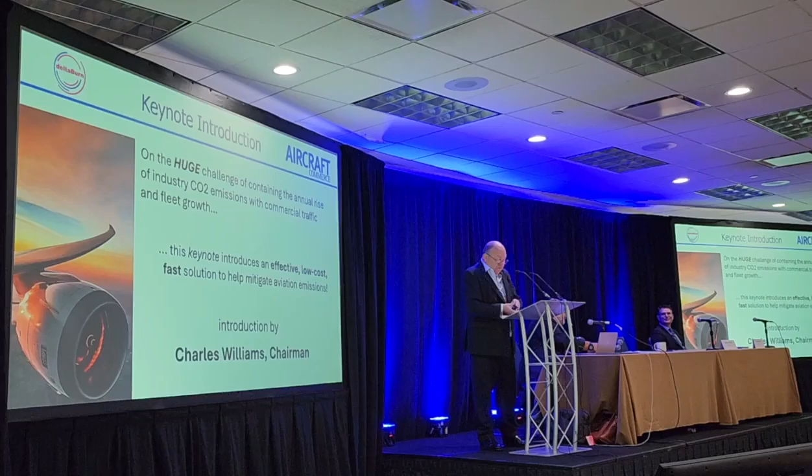I'll start off by saying the industry has a huge challenge ahead of it. As you're all aware, the industry continues to grow each year in proportion with the economy. The exception, of course, is when we get a big recession or downturn due to something like COVID, but generally the industry always recovers and continues on the trajectory.

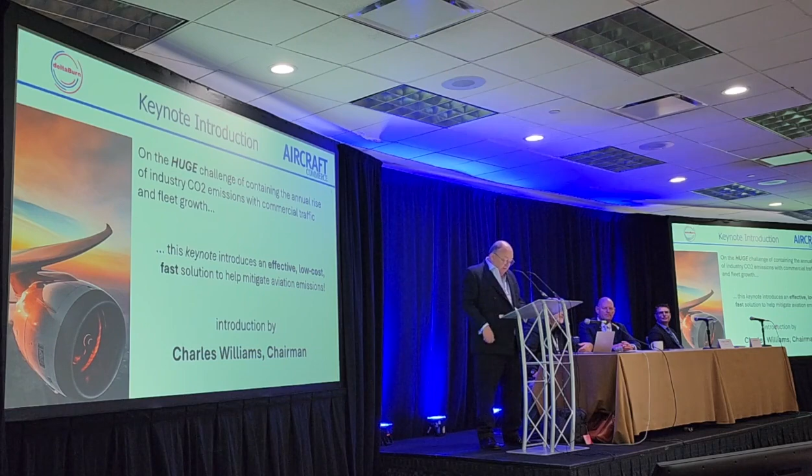Each year IATA produces a report, in the month of June, summarising what happened in the previous year. That summary includes the number of passengers boarded on commercial flights, number of commercial flights performed, the fuel consumed, and consequently the CO2 produced.

If you look at the historical data IATA produces, you'll see the average compound annual growth rate between 2004 and 2019 averages about 4.65%, which means it only takes 15 years for passenger numbers to more than double. And with that, you get an increase in the size of fleet, and an increase in the quantity of fuel consumed.

Just to summarise, in 2019 the industry consumed 96 billion gallons of kerosene, but that's risen to 99 billion gallons in 2024, having recovered from COVID. For this year, the whole year is forecast to be 103 billion gallons. Of course, that correlates to about 1.25 gigatons, or 1,229 million tons.

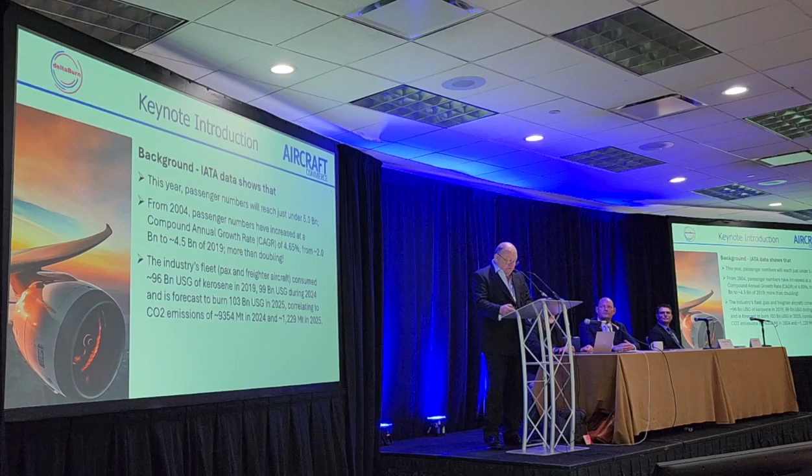Now, of course, the industry has to take its responsibility to get its CO2 emissions down. Under the Paris Accords, the industry's emissions are allowed to peak in 10 years' time, but then it's got to start declining again. The original target for 2050 was CO2 emissions of just 250 to 400 megatons - clearly a small fraction of what they are this year, and an even smaller fraction of what they're likely to be in 2035. However, in 2021 that target was changed to an absolute figure of net zero, which many feel a bit cynical about being able to achieve.

The point here, though, is that the larger the peak we reach in 2035, the larger the annual reduction has to be each year for the next 15 years to 2050.

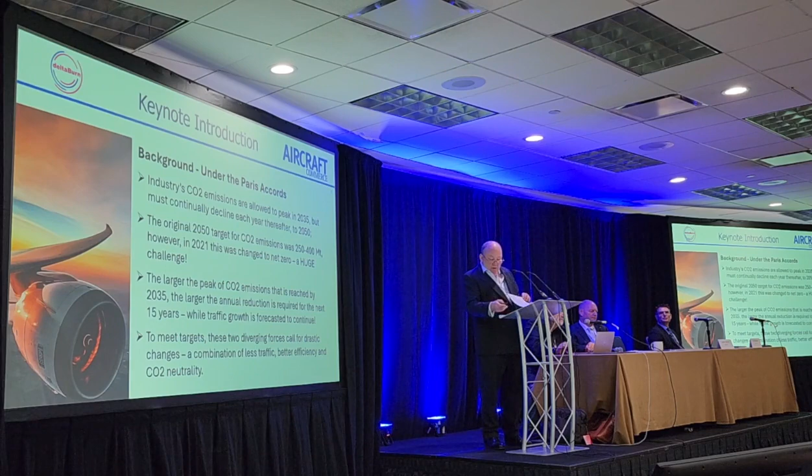As I was saying, we have a conflict because already historically, since the industry began in 1945-46, passenger numbers have increased exponentially, as does the fuel consumed, as does the CO2 emissions emitted. Although we have had a continuous improvement in fuel burn efficiency because of the steady, continual modernisation of aircraft and the overall fleet.

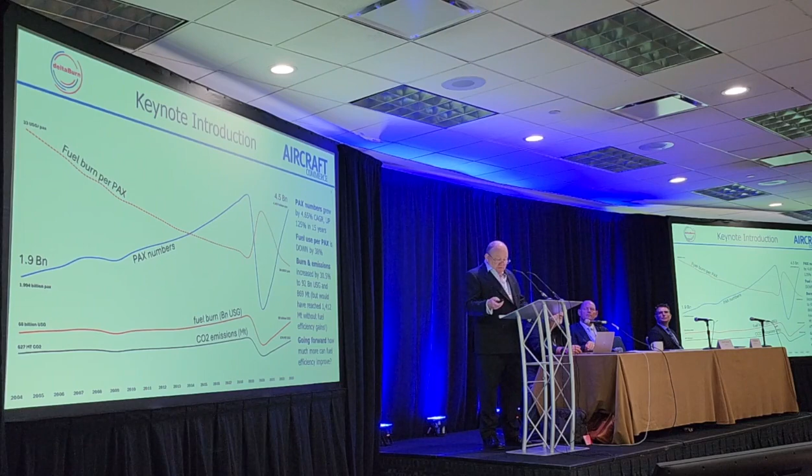Over the last 10 years, I've been at various conferences, spoken to lots of people, read lots of articles. There's all sorts of technologies that have been proposed to find an alternative fuel or propulsion system, or both. People talk about electric-powered aircraft, fuel cell powertrain, hydrogen, and so on.

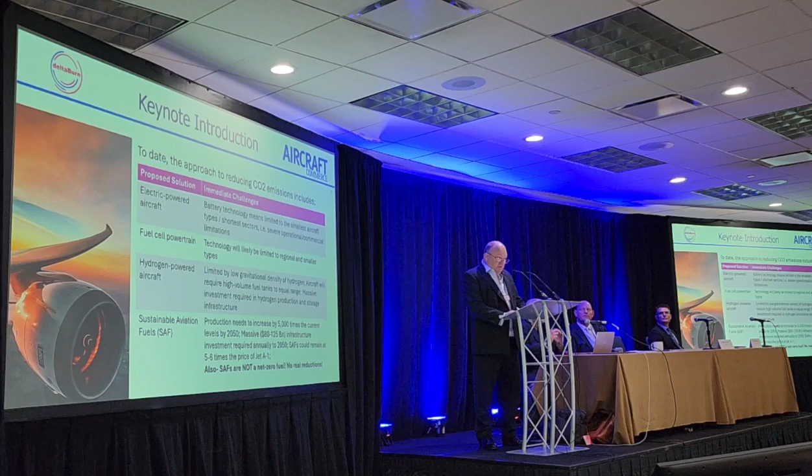As time progresses, it seems more and more likely that the big winner is going to be sustainable aviation fuels. That seems to be the only real plausible option at the moment for passenger aircraft at 150 seats or bigger.

The problem is, of course, the production of SAF is starting from a very small base. As of 2 years ago, projections were that current 2023 levels of production would have to be increased by 5,000 times to meet the demand the industry would have for the entire fleet in 2050. That in turn requires up to $125 billion of investment in infrastructure to build all these different SAF plants, and then there's still the issue of source material and what the end fuel would cost and how that would compare to current Jet A1.

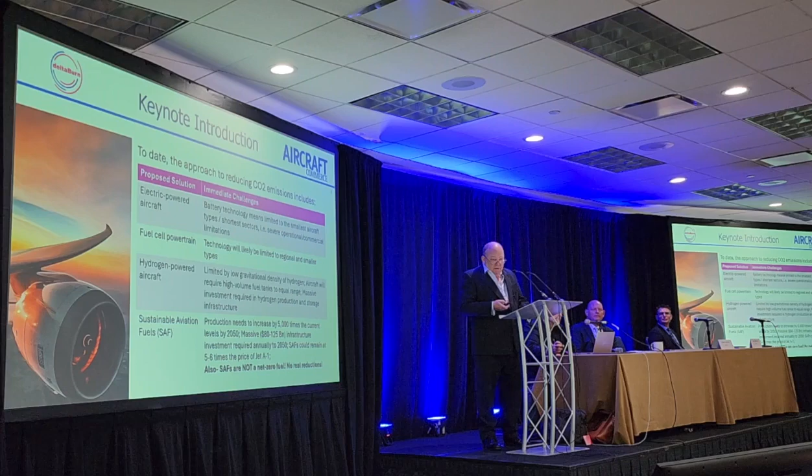Another factor, of course, is that not all SAFs are net zero anyway. So there are a lot of big question marks over reaching these targets of 2050.

So Sander is now going to explain in far more detail the DeltaBurn project. Sander.

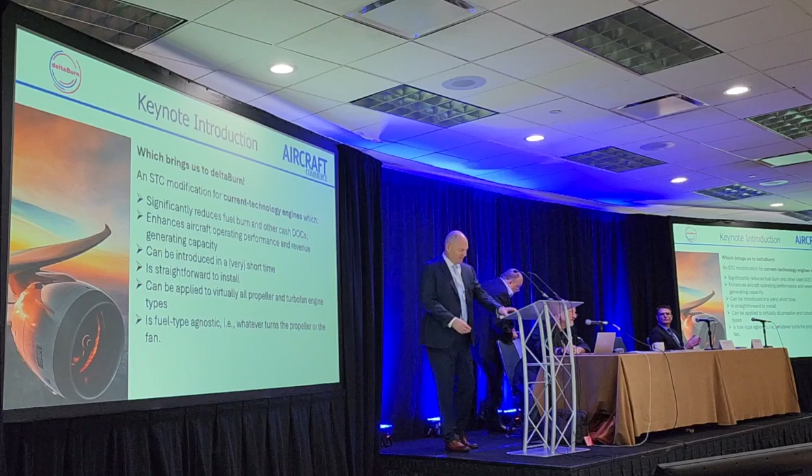So, you want to introduce yourself, Sander, or I can do it? If you look in the notes on the website, it's very interesting.

Sander Moor is an investor, board member and general manager of DeltaBurn, a Singapore-based company. Sander brings, apart from a big personality and lots of fun, four decades of flight operations support across many aero company profiles, areas of operation, climates and cultures, in most areas of flight and ground operations. The last two decades brought all of that together in deep airline fuel and operational efficiency expertise. Sander is managing this exciting startup, which he's about to tell you about, with significant fuel burn reductions and emissions improvements. So Sander, over to you.

Thank you very much, Nick. And thank you all for staying this late on the second day, which is not the usual size of crowd that we see. It's very nice, thank you. Thank you for being here for my next 20 minutes of fame.

Many of you have seen the outrageous advertising that I put out about the one-third fuel burn reduction that we talk about. I start this slide with double digit, which isn't just another way of saying it's a lot.

So who are we, DeltaBurn? We're an R&D company, basically. We do aero fluid dynamics, and not only that, we also try to bring this to market, so we do STCs. We are registered in Singapore, and we have legal entities around the world where we do STC work. Our main base of operations today is in Phoenix, at the airport of Deer Valley, where we have one of our aircraft that we use for test flying.

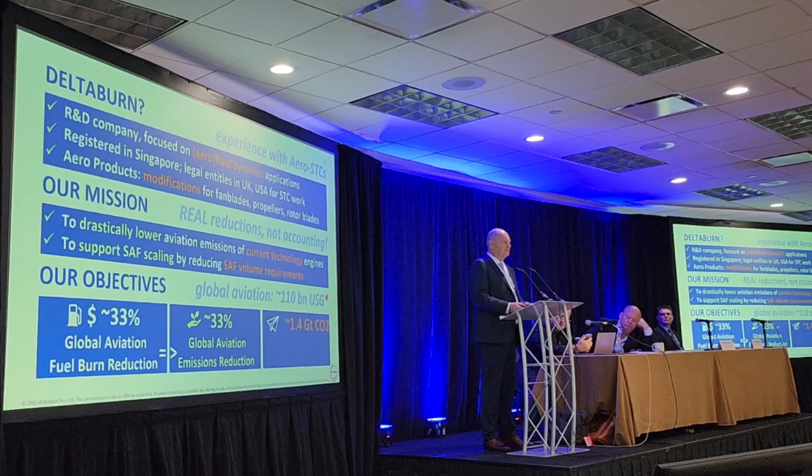110 billion US gallons - it's just another number. We've seen 103 in the previous presentation. It's 110 as far as IATA is concerned, but IATA only represents 80% of the airlines around the world, or the traffic around the world, so the number is likely to be quite a bit higher. We actually personally think it's around 125, 130 billion US gallons, which produces around 1.4 gigatons of CO2, give or take, which is 3.6% of the global output expected for this year, which means that if we can reduce it by one-third, it's more than 1%.

Now, the other thing about this is that the slice of pie in the whole CO2 balance that aviation represents is increasing, because other industries are getting greener faster. So the pizza slice of aviation CO2 is growing over time. All the more reason to do something about it.

The last thing that we do with reducing fuel burn so much is increasing range of current aircraft by up to 50%. That's the nice additional effect if you're able to reduce fuel burn that way. The big elephant in the room, 33% - how do we get there?

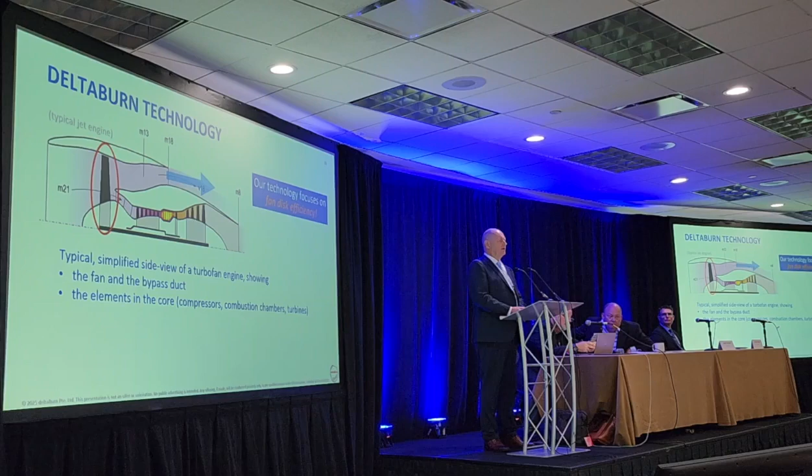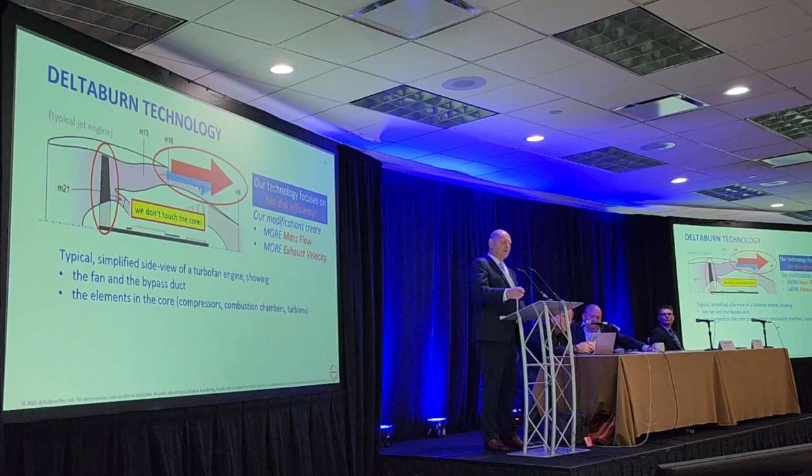Our technology purely focuses on the fan disc itself, the propulsion disc. So we increase the efficiency of that disc. Now, how we do that is still a little bit under wraps, but what we do is we drastically change the airflow around the fan blades. And in doing so, we create some really interesting secondary effects, which result in much more mass flow through the bypass duct and a lot more exhaust velocity. And this is signified by the larger red arrow.

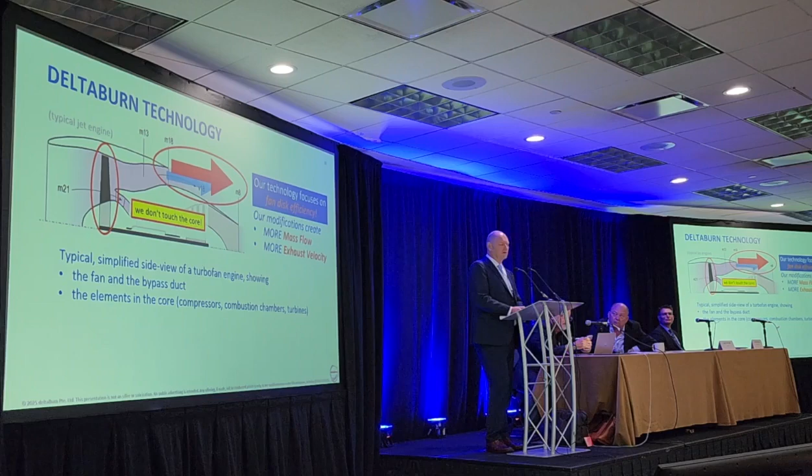Now what that means is, because we have more mass flow and more exhaust velocity, because we changed the fan, we have a lot more thrust. So now your 32,000 pound engine is producing a lot more thrust, which on the face of it is a great idea, except the bearings in the engine don't like it that much, and possibly the engine pylons don't like it that much if you start to pull a lot more. So what this actually means is, if you power back a bit, you can actually fly with the same thrust, but now at a lot lower fuel burn. And that's actually what we're doing.

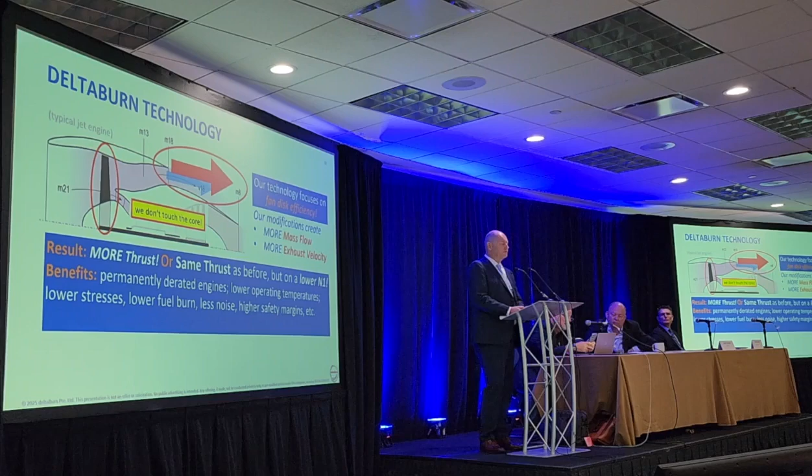That's the trick. We make the fan more efficient, we get more bypass flow, and because of that we can bring the power back and get the same thrust with less fuel burn. Now, there is a whole string of benefits attached to this.

We have permanently derated engines, much lower operating temperatures. On a typical flight we see 100 degrees less EGT, much lower stresses in your engines, much lower fuel burn, less noise on takeoff and landing. And there are much higher safety margins, because that extra thrust, if you want it to be available in a single engine situation just after takeoff or just before landing, the flight crew will have that extra thrust available. So it increases safety margins in that particular respect, but also during normal operations, because the engine isn't stressed as much as it normally is.

But the biggest thing is this: when we reduce fuel burn by so much, we reduce the emissions by so much as well. And not just the CO2, but because we run less fuel, we also produce less water, which means less contrails, which is also a topic of interest today. Our NOx is cut by around 50% because we run the engines at lower temperatures. So there are a whole string of benefits.

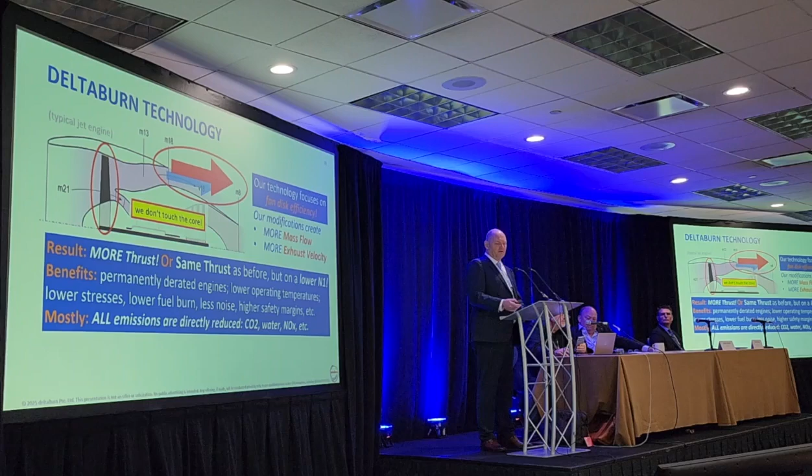Now, magic. Nope. We call it real science, and the patent office seems to agree. We have flight tested this many times, we have demonstrated this many times, and I will show you a demonstration in just a few seconds.

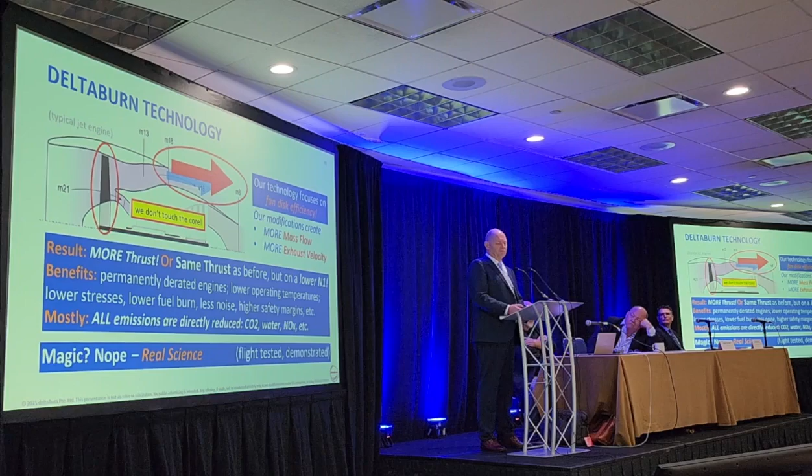The effect that we do on the engines is actually a bit similar to this, without the noise and the light show. But we see over 50% more thrust at altitude and at speed. And that's about the same amount of thrust that you really lose after takeoff. An engine, actually a jet engine with the fixed blade propeller at the front, where the fan is, loses about 50% of thrust all the way up to flight level. And we basically give a lot of that back.

What I'm going to show you is a 737 clip. We modified one engine on this aircraft, the left engine. And what you're going to see is a takeoff. It's working. Of note is that the left engine, before we modified it, was burning hotter and more fuel than the other engine. And I'll talk you through that a little bit later.

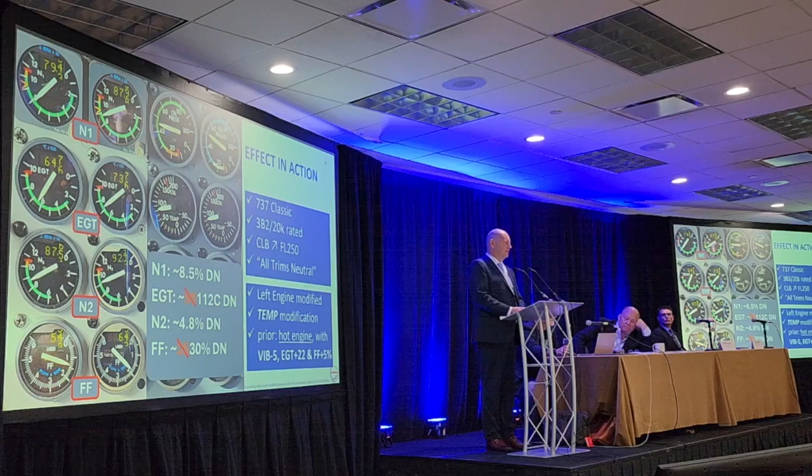Yeah, a 2-generational leap. The other thing I mentioned earlier was the 50% increase in range, which is an effect of a much lower fuel burn. Now, how does that translate to a real world situation?

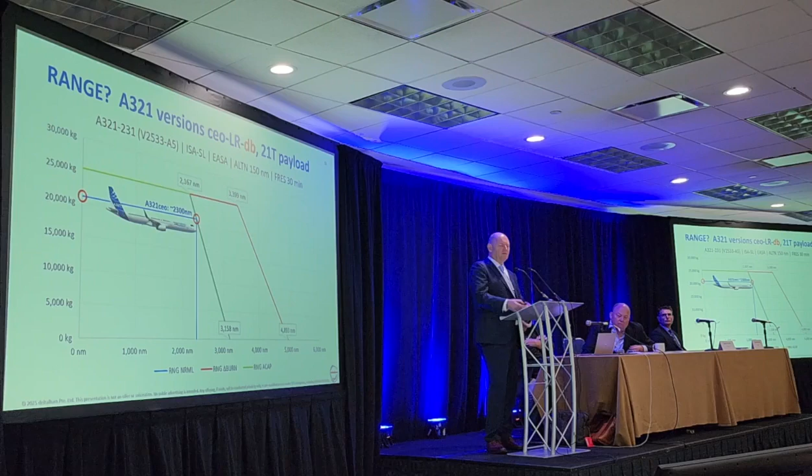Let's say we have a classic A321 CEO. That airplane has a range of around 2,300 miles if you take a 21-ton payload. If you modify that aircraft with our modifications, you get an airplane that does over 50% more, which is 3,600 miles. Now that becomes a very interesting airplane because it's only 10% away from the current range of the 321 long range, right? So with a very easy change to the aircraft, you create an airplane that is doing magic.

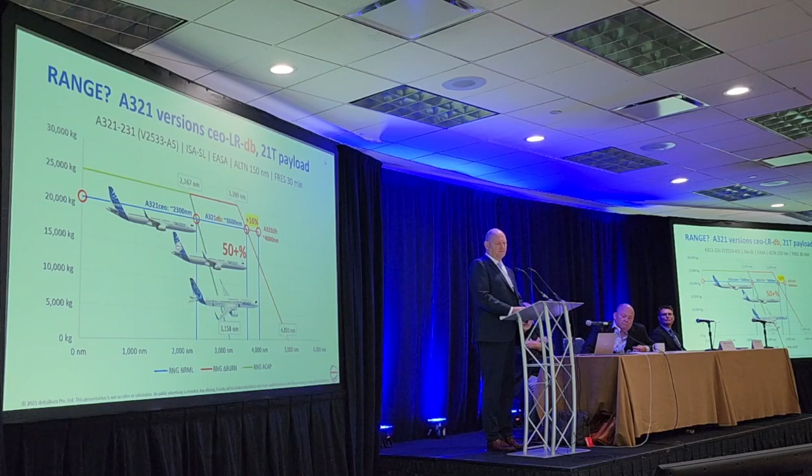Taking that same line of thinking a little bit further, if you look at the typical A380, burning, as we know, a lot of gas, doing around 4,500 hours a year, maybe even 5,000 hours. For the example, it doesn't really matter that much. And that fuel burn could be 12.5 tons, it could be 12 tons. It depends on how the aircraft is used, and that fuel price.

Then operating that one airplane per year will set you back around $39-40 million. And it will produce 170,000 tons of CO2. Now,

put the aircraft in an A-check, because what we do to the engine can be done within an A-check. And now we have 4 adjusted engines, and we have a thing called the DeltaBurn effect, which is a third reduction in fuel, a third reduction in cost, and all the other benefits that we talked about before. Now, if I were one of the owners of this aircraft, I would maybe pay attention. In addition, all the other effects that we just talked about.

Taking this one example to another next level would be this. It's a nice picture, by the way.

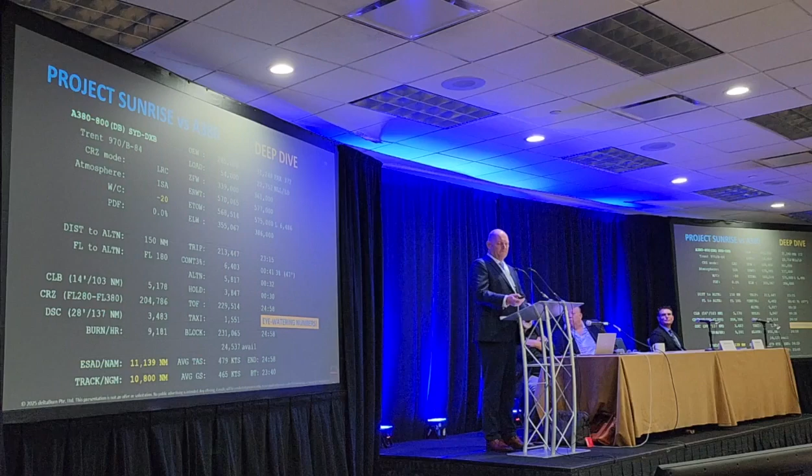And those are indeed eye-watering numbers. So we've used this term before, the A380neo. Somebody else has used this term as well for many years, and Airbus decided not to do it. We are, in a way, capable of doing this, of giving the world this, except we're not going to call it an A380neo. We will call it an A380 DeltaBurn.

But it certainly is a possibility. And all I'm asking anybody with an A380 is just give us one for 6 months, we'll do the STC, and we'll show you how it works. We don't have the cash to buy one ourselves, so that's the issue.

Where are we today? That's a big question. We do not have the jet engine STC yet. We are a privately funded organization. We do not have the millions needed to buy a CRJ or a 737 and do the STC. What we do have is enough money to do the STC for a turboprop. That's why we acquired this Merlin, our test bed, parked in Arizona at Deer Valley Airport, which we use for our turboprop STC, which we hope to complete by the first quarter of next year.

We developed some really interesting tech. We wanted to know exactly how much thrust these engines and propeller combinations are producing, and we couldn't find anything to satisfy our needs. So we built our own test rig, test station. It's basically a chain with strain gauges, and we measure very accurately, digitally, how much the gear is pulled forward by whatever power setting we're using. Now we can perfectly match the thrust produced by the engine-propeller combination with the torque we set in the aircraft to reach that thrust.

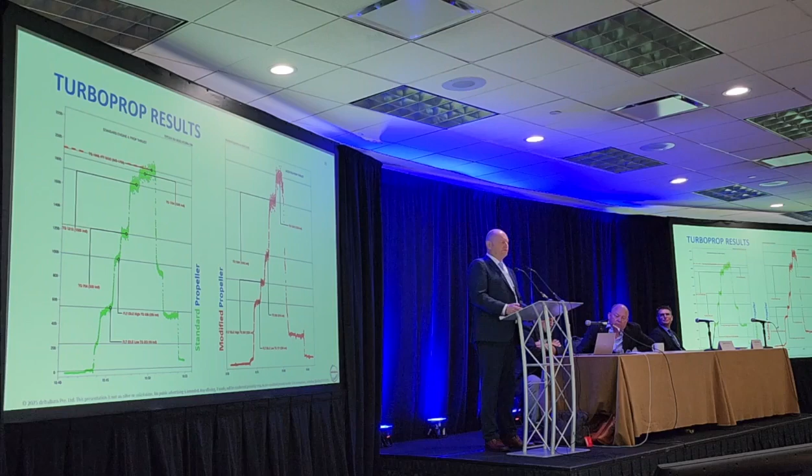Left image is unmodified, right image is modified. The thing that jumps out automatically is that the right engine is doing much better. On this particular day, we reached a maximum thrust of 1,860 pounds on that combination at a torque of 1,908 foot-pounds.

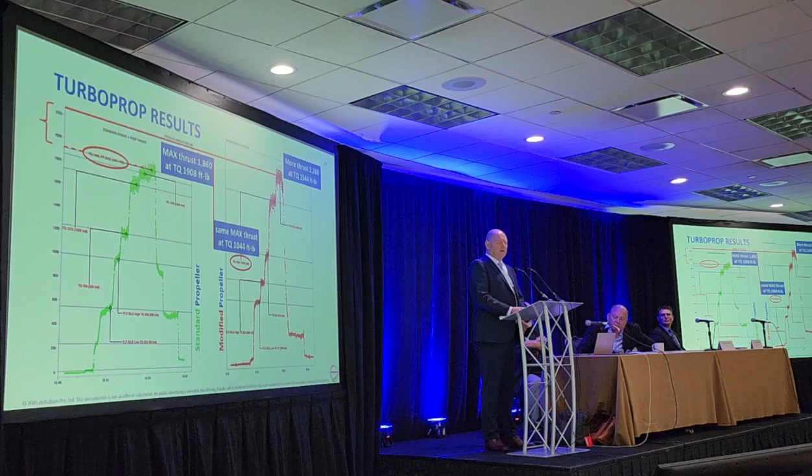The modified engine reached that same thrust at a much lower torque of only 1,044 foot-pounds, because of the modifications on the propeller. Pushing it all the way up to maximum power, we achieved 2,260 pounds, but only at 1,500 foot-pounds, still much less than what the left engine needed to reach that thrust.

So the equal thrust condition we reach on this aircraft, we reach at 45% less torque. That's a number nobody would believe unless they saw it with their own eyes. The other thing is the maximum thrust is 21% more than the standard engine, but still at almost 20% less torque.

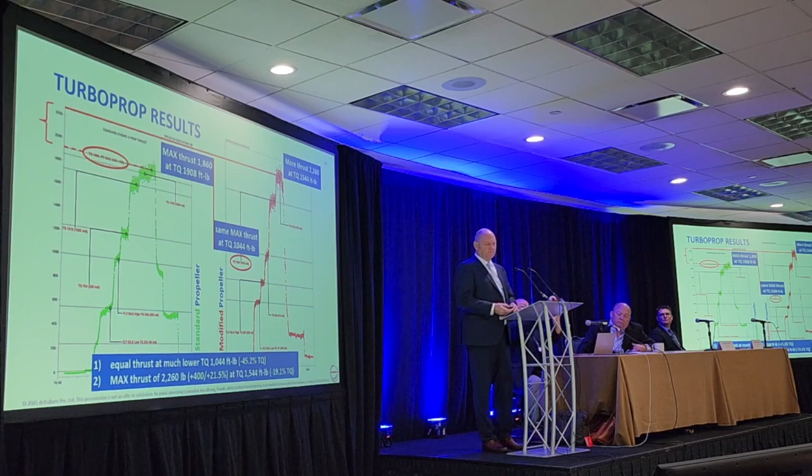So how does it all come together for a roadmap? As we said, we're doing the internally funded STC at this time. We hope to bring this STC to market in the first quarter of next year. Doing that will put the fan STC, the first one, within reach, because out of that first STC we hope to generate the revenue to go to market and buy that little airplane and do the STC.

Unless, of course, something else happens - unless an airline says, hey, you can use our airplane, or here's a bag of money. But until that time, we have to do it this way. We will get there eventually. I've been on too many test flights to ignore this - I cannot say it doesn't exist. And once you see this, you cannot unsee it. So we will get there. What we'd like is to get there much faster than our current roadmap, because otherwise the world will just have to wait 1-2 more years until we're ready.

It's about 9 months for the first STC for the jets, because every authority - FAA, EASA - they don't really like you playing with engines, major parts of the airplane. They really want to see everything done right. But subsequent STCs will go faster. We're targeting about 50 STCs, 50 airframe-engine combinations, and after about 5 years we hope to have modified each and every airplane on this planet.

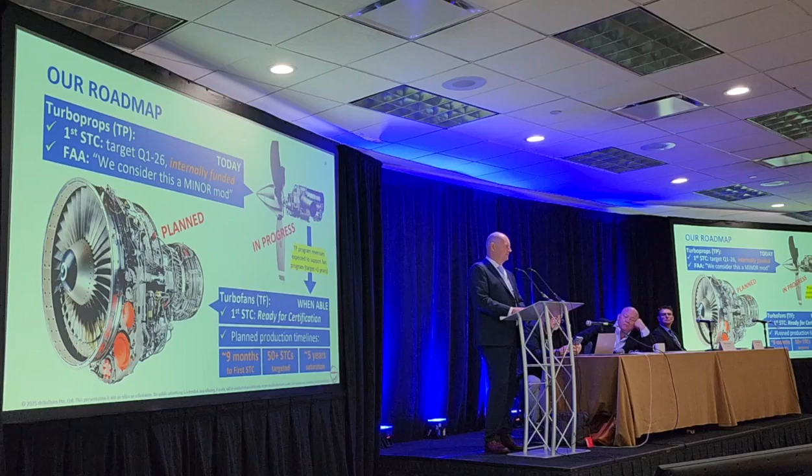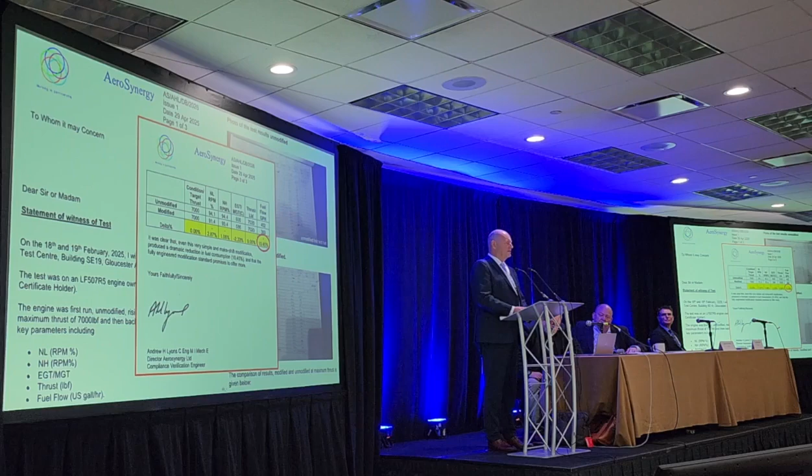So what we reached on this particular test, after our modification work, which took about an hour, we reached 10.45%. For us, that was a real disappointment because that's not what we're used to seeing. But for the Rolls-Royce gentleman and the other engineer, they fell off their chairs. They had never seen anything like this, especially not from a modification that didn't take the billions that Rolls-Royce just dumped into their latest engines to make it 1% better. This was done within an hour on an engine, and the results were right there. So even though we were disappointed with the setup and the results, it's still a testament to the enormous potential of this technology.

Which is leading to the MOU for the first fan STC. So we're in final negotiations right now with an operator to do the 146 STC with us. This is a direct result of us working with that engine type certificate holder who made this call.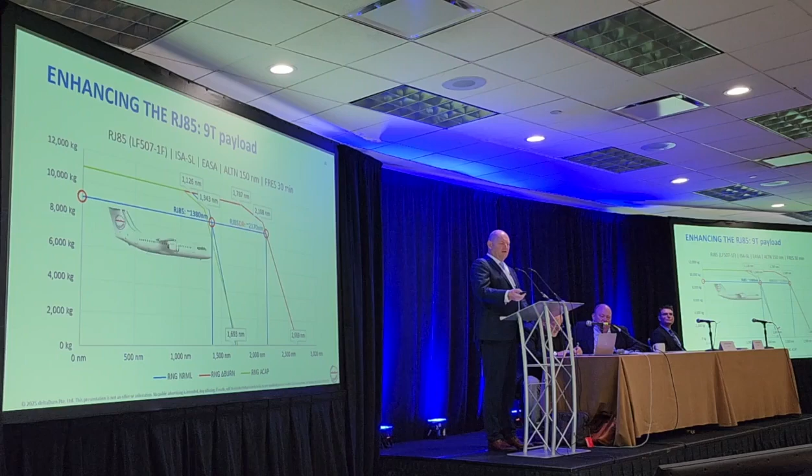For this particular operator, the big change we're going to make for them is actually twofold. They do a lot of tech stops today, flying in the Arctic, long-range operations, but this airplane is not really suited for it. So we will actually give them a lot of direct flying. The other thing is safer operations, because of our modifications, the engines turn slower. There's less effect with icing, both on ground and in the air.

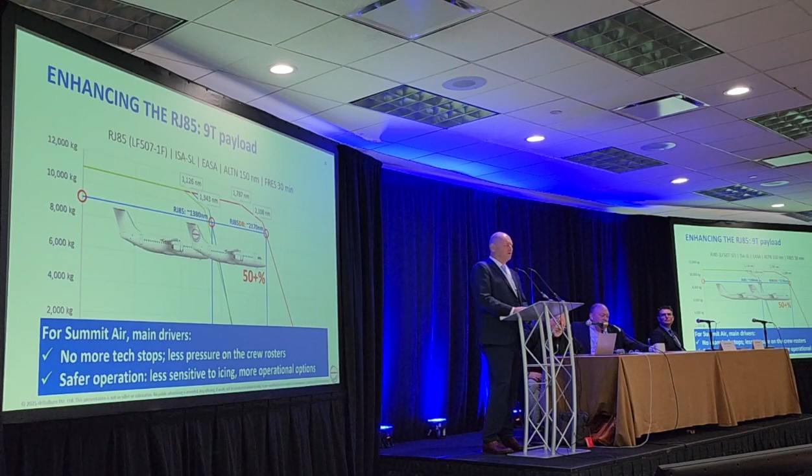So by now, you sort of can expect that we will bring this to market, and you might wonder how is this going to look to you, the operators? What's it going to look like? We will lease our STCs to you, operators. You don't have to put money up front, you don't have to buy the technology, we will lease it to you.

We will do invoicing from verified savings, so just like you do with your fuel efficiency programs and with your FOQA programs, you'll share some data with us, and based on that we will invoice you, out of your savings.

The product will be installed by us, and like I mentioned before, this fits within a standard A-check. The 737 flight that you saw on screen, we modified that left engine in 38 minutes. We took 1 minute per blade. And then you get the results that you saw.

Now, that was a temporary modification. It wasn't designed to last, it was just there for the demo. The STC level product that we put on has a life from C-check to C-check. We also do the CAMO. Based on the data we get from your organization, we know how well the installations are performing. The design life is the C-check interval, or better. We don't know yet, we haven't tested it yet all the way to the end of the first C-check.